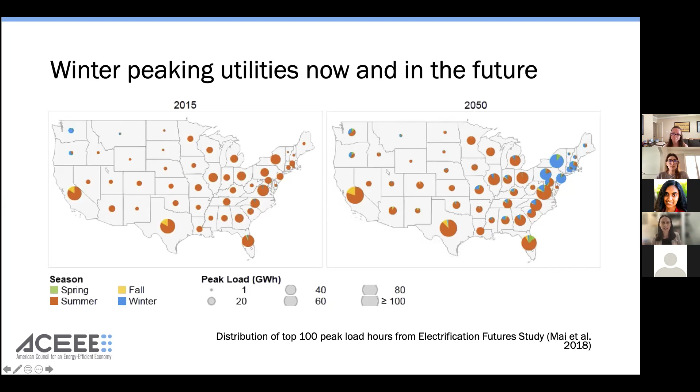The summer peak tends to run afternoon, early evening, generally looks like one peak. In contrast, a winter peak tends to be bimodal, and the top of that peak tends to be in the morning. It's also the case that not all winter peaks are created equal, and there are winter peaks that look very brief. It's just a couple of hours in the morning, and there are winter constraints that can be as long as a couple of weeks. And so there's really a lot of diversity in grid conditions associated with winter challenges that I think Texas illustrated quite keenly this year.

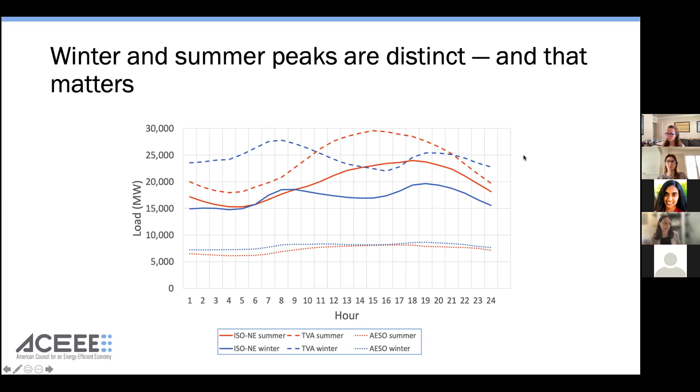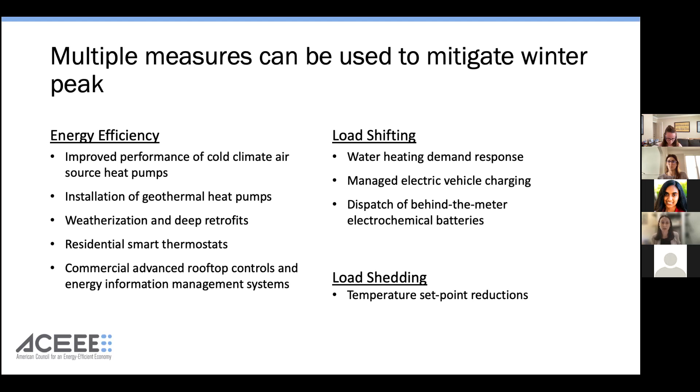Our research took a look at one region in particular, New England, which is projected to experience winter peaks with electrification. And we wanted to see, okay, what happens on a really dangerous polar vortex day in a highly electrified future. So we took a look at, projected out to 2040, what might that peak look like? And what might we be able to do with demand reduction?

So that's just kind of a picture of the opportunity in New England. Wouldn't look the same necessarily in Texas, but many of the characteristics of these technologies are similar. And so it offers a good roadmap or guide to how we might think about problem solving in other regions as well. And today we're going to hear from Tom about how a utility in the Southeast has thought about this kind of problem solving in their service territory.

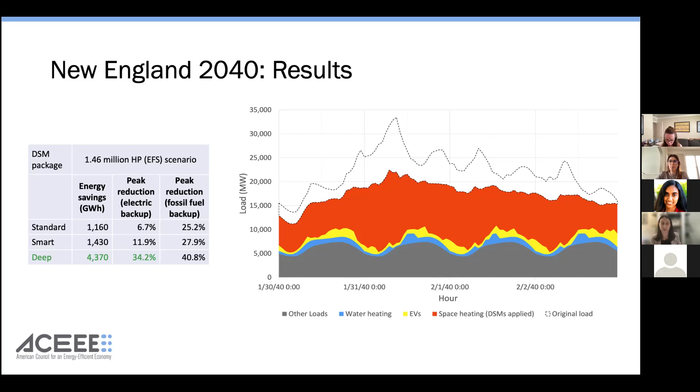There's also lots of other measures that could have a role to play, but I think it's important to focus where the peak is, and that's really in the heating space. So starting to think about buildings and their heating loads and their cooling loads, especially in a place like Texas where you're going to have heating and cooling challenges, is really crucial.

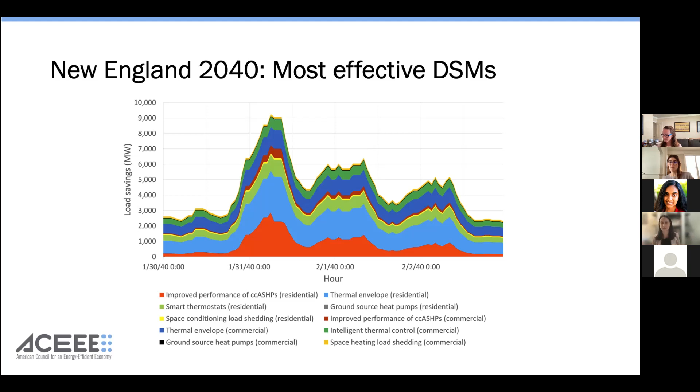Today, I'm really excited to introduce three fantastic speakers.

I'll start with Allison Silverstein, who I've known for many years and who works and lectures for government and private clients on a whole range of issues, from transmission and distribution to energy efficiency to renewables. She's written some of your top and most famous papers in the energy space. And most importantly to me, Allison is a member of ACEEE's board and a real expert on the Texas grid. So she's going to be able to give us some context about the recent reliability challenges and share a little bit about a report that she wrote with former commissioners from the Public Utilities Commission of Texas on how we can avoid what recently happened in Texas.

Next up will be Sneha Ayyagari, and Sneha is a senior associate on RMI's carbon-free buildings practice. She leverages her background there in civil and environmental engineering to advocate for policies and technologies that contribute to a more just and sustainable built environment. That is a good mission statement. I love that. She is a part of the team that is launching the Resilient Texas Communities work. So Sneha is going to give us a perspective on the role of communities and local governments in helping to advance resilience.

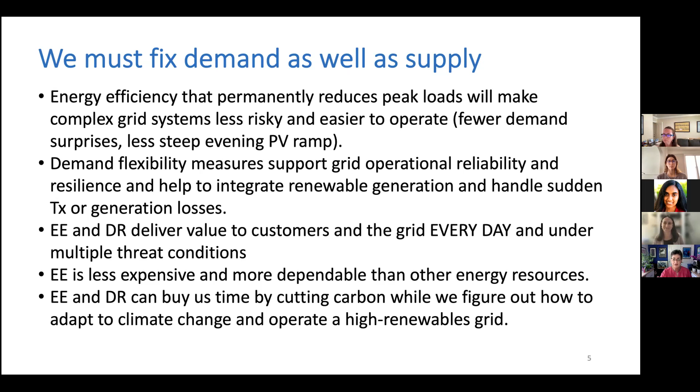So what I've tried to do here is lay a foundation so that Sneha and Tom can now tell you why everything that they're doing matters and help us learn. Thank you. Thank you so much, Allison. Sneha, we're looking forward to hearing your thoughts as well. And Allison, thanks for teeing things up and giving us the context for what happened and how we can think about the role of the demand side. Sneha?

Great. Can you see my screen now? Yes, it's showing in slide sorter mode. There you are. There we go. Is it all good now?

Okay. All right. Well, thank you so much, Allison, for that wonderful introduction. It's really an honor to be here with everybody today. My name is Sneha Ayyagari, and I'm a senior associate in the carbon-free buildings team. I also grew up and lived in Texas for most of my life in the Dallas-Fort Worth metroplex. So both the personal experience of the storm and the context here is really important to me personally, as to most people on the call, I'm sure. And I want to acknowledge the work of many of my colleagues for their contributions to the slides and research that I'll be sharing today.

So as many of you know, the Texas grid is only one vulnerability of many. Texas is ranked first in the country in terms of both variety and frequency of natural disasters. This particularly has equity implications, as Allison mentioned. Land use patterns also contribute to communities being vulnerable to flooding and heat islands, in addition to extreme weather events. And disaster relief funding has historically flowed to wealthier communities and residents. And so local governments are on the front lines of crisis response and are best positioned both to understand and represent the needs of communities in partnership with community organizations.

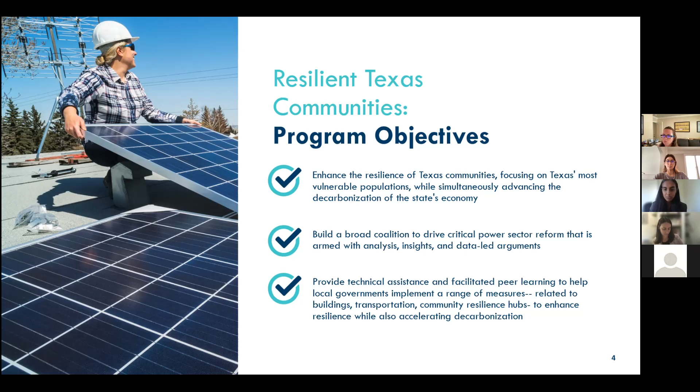And we'll be working with cities on developing those programs further. And today I'll be focusing on opportunities in the building sector. So as Allison teed up very nicely, the winter storm, there was an increase in demand for mostly inefficient electric resistance, and this was a major driver of the crisis.

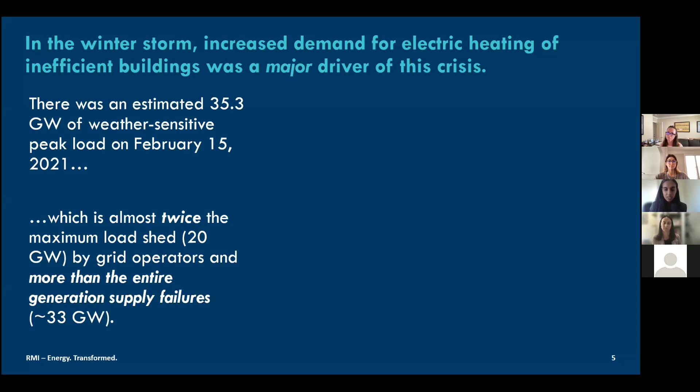There's an estimated 35 gigawatts of weather-sensitive peak load on February 15th of this year. And to put this in perspective, this is almost twice the maximum load shed by grid operators and more than the entire generation supply failures. And we know this from extrapolating from ERCOT's data.

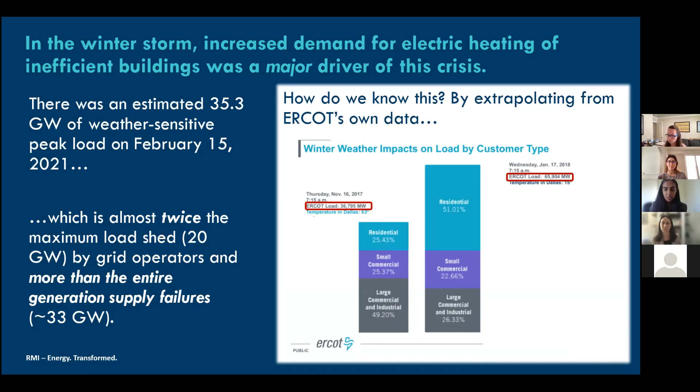So ERCOT found a little under 30 gigawatts of weather-sensitive peak load, comparing a 15-degree Dallas day in January of 2018 with the same time on a warmer day 2 months earlier, and extrapolating based on temperature conditions and population growth, we arrived at this. And this illustrates the need for cities and policymakers to emphasize ways to make buildings more resilient.

There's a great opportunity in Texas for resilience upgrades given the characteristics of its building stock. So Texas ranks first in new construction rates in the US. More than 2/3 of Texas homes were built before the advent of state energy codes in 2001, and 37% of single-family homes in Texas have no wall insulation, which also leads to water issues, as Allison was mentioning.

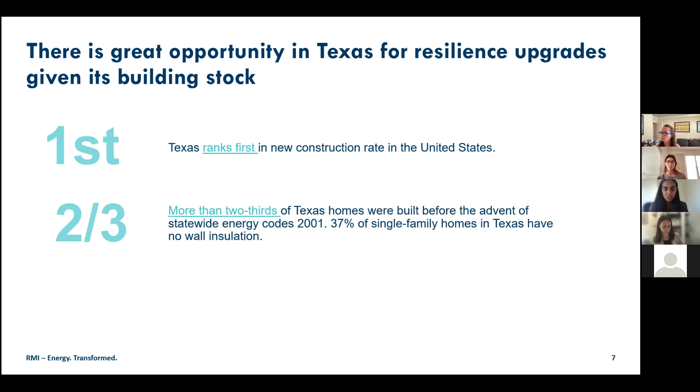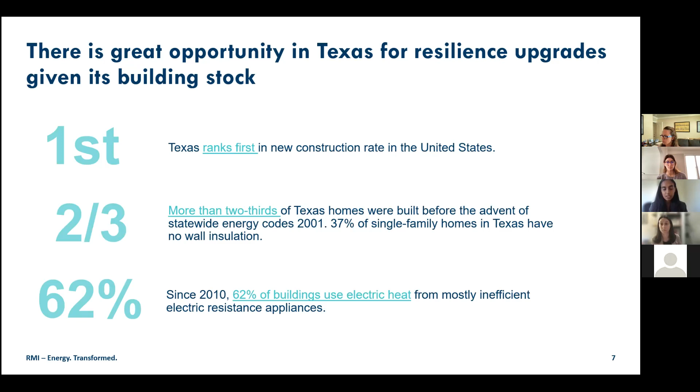And then since 2010, there's been a lot of construction of electric heat, particularly inefficient electric resistance, and switching to heat pumps or more efficient HVAC systems can help reduce energy bills and also strain on the grid. And in addition to resilience, there are many other benefits, as Rachel's presentation touched on as well, including improved health, decarbonization, and economic development.

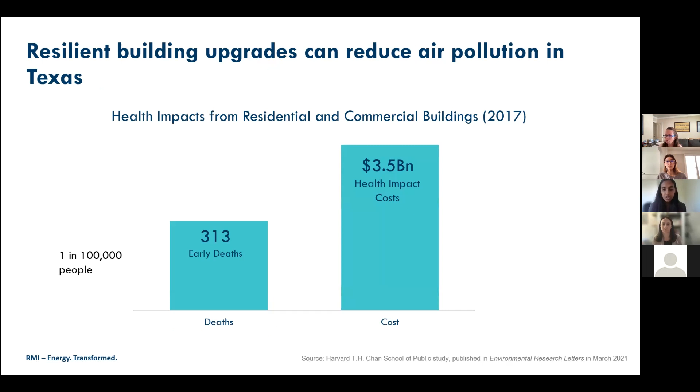So in Texas, air pollution from the use of fossil fuels in homes leads to over 300 premature deaths per year and almost $3.5 billion in health impact costs, according to a study by Harvard. And recently, research from MIT is showing that the building sector contributes the largest share of premature deaths associated with air pollution compared to other sectors.

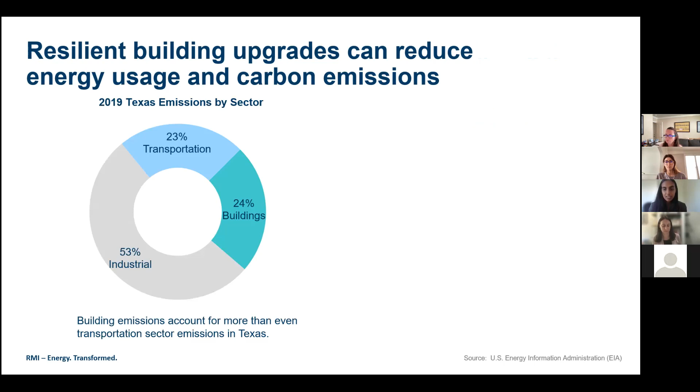Another critical consideration is the concept of energy burden, which is the amount of money a household spends on energy divided by the household income. And for higher income residents, the percentage is around 2%, and it's almost 20% for families in the lowest median income bracket.

So TEPRI ran a survey in mid-October of 2020 to find out how the pandemic was affecting energy burdens, especially for communities of color, and found that almost half of respondents who identified as Hispanic in their survey of low-income customers, and 40% who identified as Black, were struggling to pay their electricity bills.

And according to ACEEE, nationwide, bringing low-income housing stock up to efficiency levels of an average U.S. home would eliminate 42% and 68% of energy burden for Black and Latino communities, respectively. And energy burdens also have resilience implications.

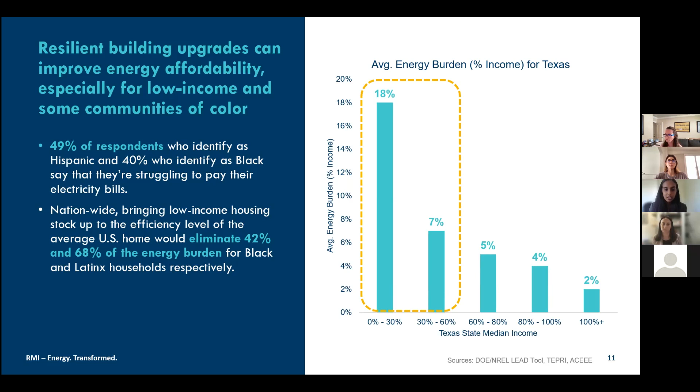Grid operators intentionally avoided blacking out circuits that were shared with hospitals, fire, and police services, and many of these also were in wealthier, predominantly white areas. And so it's possible that non-white communities and households and also lower income communities lost power for much longer than others.

Weatherization can also impact how long people stay safe in their homes, especially in extreme weather events. This is especially important for vulnerable groups such as senior citizens and young children, because they can be at a higher risk for symptoms such as pneumonia, also hypothermia.

And I did some analysis in early 2020 of a modeled outage in Minnesota, and it was showing how, with higher levels of insulation, the buildings were able to maintain higher levels of safety for longer. And we also saw this play out in Texas this year.

For example, two similar houses, built around 1910. One was retrofitted and stayed above 50 degrees despite losing power. And the unimproved house reached below 40 degrees in the first 8 hours and was abandoned after it dropped below freezing.

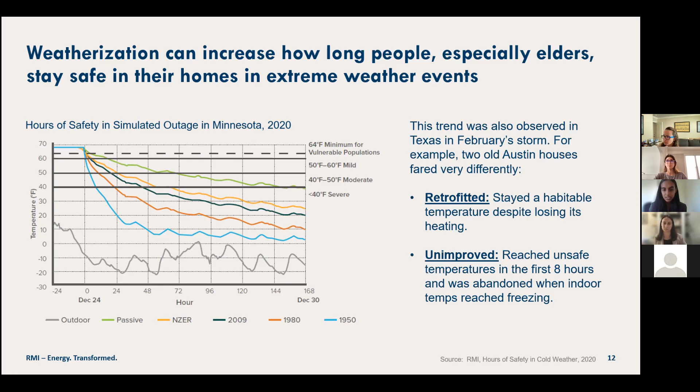And from a grid perspective, simple weatherization alone can reduce heating demand by 11 to 15%, according to ACEEE. And in addition to these benefits, there are also economic benefits of creating local jobs in construction and building trades, and there are many different sectors that can benefit from building decarbonization at scale.

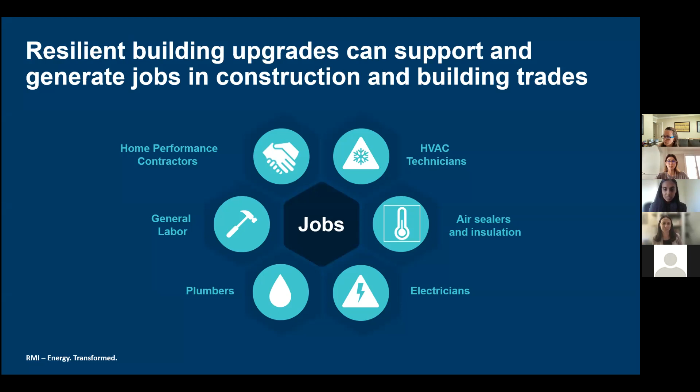And I just wanted to end with a quote from our founder, Amory Lovins. And he said, most analyses ask only what went wrong with electric and gas supply and why. But that worthy question ignores the first half of the problem and the opportunity. Energy efficient buildings are the cheapest, deepest way to protect lives, build grid resilience, and strengthen our economy and security.

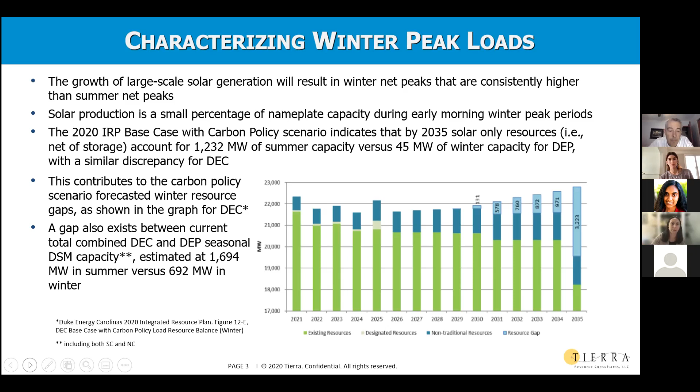And so now, the thing that makes this, I think, even exacerbated for utilities, if we're not being proactive about this, is that DEP and DEC, Duke Energy Carolinas, two systems, also have been focused on DSM that's serving summer peak capacity, because that's where the value's been and avoided cost in the past. And so if you compare summer DSM to winter DSM capacity, there's about 1,000 more megawatts of summer capacity than winter. So we have a large emerging winter resource need gap, and we also have an extreme gap in the capability of what we can do with demand side management programs, winter versus summer. So you can see a problem brewing if we're not going to do something proactively about this.

So as I mentioned, the Duke system, one of the things that we really thought was important here was we need to follow the loads. What's driving these peaks? And in Duke's system, you can see it's pretty obvious. Look at large commercial industrial, which is that bottom section of this chart. It is pretty flat. And so while there is some demand response you can get there, that's not the customer segment that's really driving that winter peak. And you can see in the top section, it is really residential loads that are driving that peak, and the residential peak starts around 6 a.m. to 9 a.m. And one thing that is interesting is that on a typical day, that length of peak time is much shorter than what Duke's summer peaks look like.

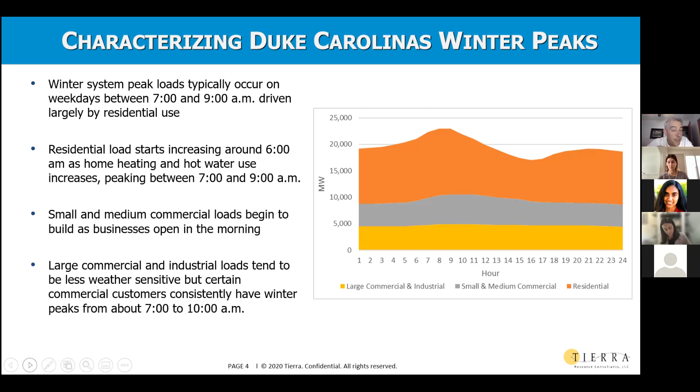However, Rachel and Allison pointed this out. That doesn't necessarily hold true in all kinds of extreme climate events. The other thing is, it is a lot harder to forecast the exact performance of residential heating when we have a lot of heat pumps with supplemental heat strips, and it's unclear exactly when those are coming on. And so I think more research needs to be done around exactly what electric heating looks like, and the prevalence of heat strips in a market can really change your peak on those very extreme winter days.

Oops, I went a little too far. And so I'm going to

I'm going to condense a lot of findings into one slide that gives some key takeaways, and I think also some guidance in terms of what other states could be learning from what Duke's done. I think it's really nice that Duke's been proactive about this, and I commend them for being proactive and working with stakeholders on how to address this with a new DSM portfolio that would be more winter focused. And so again, what we found is, why is winter peak suddenly an issue? It's because of their move towards intermittent renewables in their goal to get to 100% clean energy.

And in my company, the clients that we're seeking out are actually utilities that are seeking to go to 100% clean, because it does bring up really interesting issues associated with how you are going to make sure your DSM programs are, as I say, rowing in the right direction and helping you to meet those needs, and figuring out how that might need to change over time with what programs you offer. And again, one of the things we noticed is they are different. Winter peaks are different than summer peaks. They are typically shorter in terms of daily duration with Duke. And we like that because it gives more capability for things like load shifting and demand response to have value.

But we also have to be careful that they are harder to predict due to electric resistance heating, and also those kind of longer, more extreme winter peaks that we know are out there. However, one of the things that we certainly found was that in Duke's territory, because their programs have been focused, they have a really broad set of programs, but they've been focused on summer. And so significant winter peak savings potential is available. Over the planning horizon, we found about 1,300 megawatts of winter peak capacity from demand side resources.